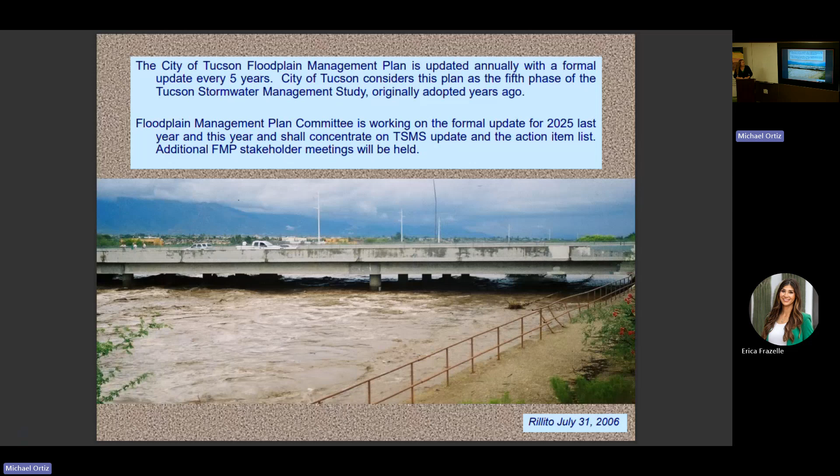We talked about the purpose of the floodplain management plan. It helps identify key projects and action items we have to prioritize, and it helps the public understand our unique floodplain conditions and hazards. It's our path forward for management of the floodplain.

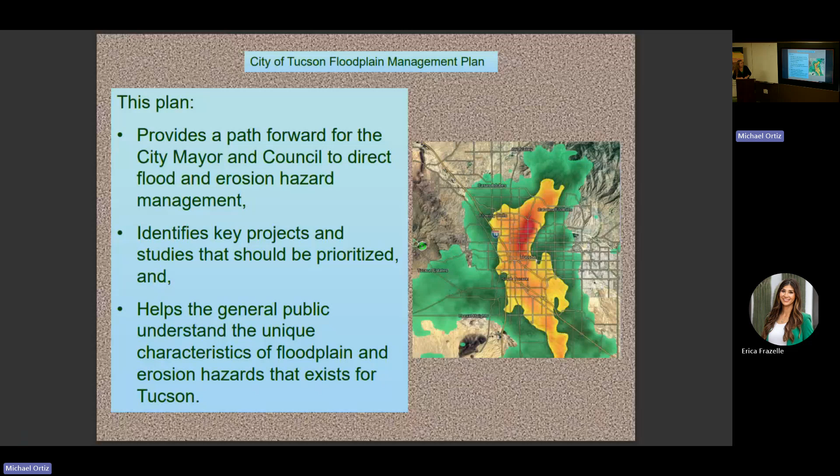This week is Monsoon Safety Awareness Week, which started yesterday, and that's why we're holding our floodplain management plan this week.

Our next speaker is Irene Ogata. Irene, do you want to stand here? Sure, I don't know—would it be better for me to log on? It's there. Oh, it's there? Okay, I uploaded it. There's a next one. Oh, you want to control it? Yeah, sure.

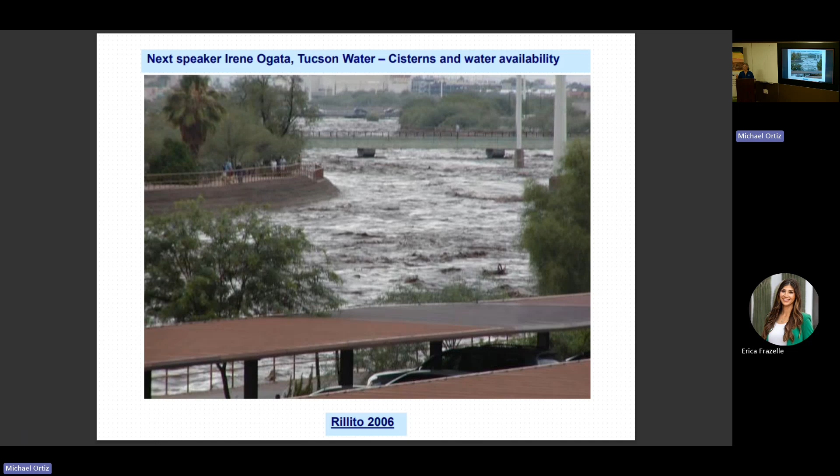So why is Tucson Water here? We're conservation and stormwater resource. Let me give a little background about Tucson Water itself.

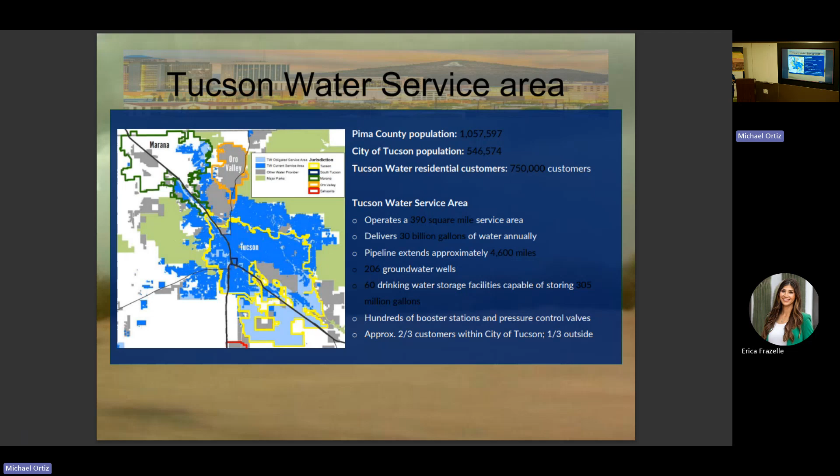We're 2/3 within the city boundary—the yellow is the city boundary, and 1/3 is outside the city. We have over 390 square miles in the service area, covering some of Marana and some of Oro Valley as well.

If we look at our water resources, we now say we have 5 water resources. Let me see if I can use the mouse here.

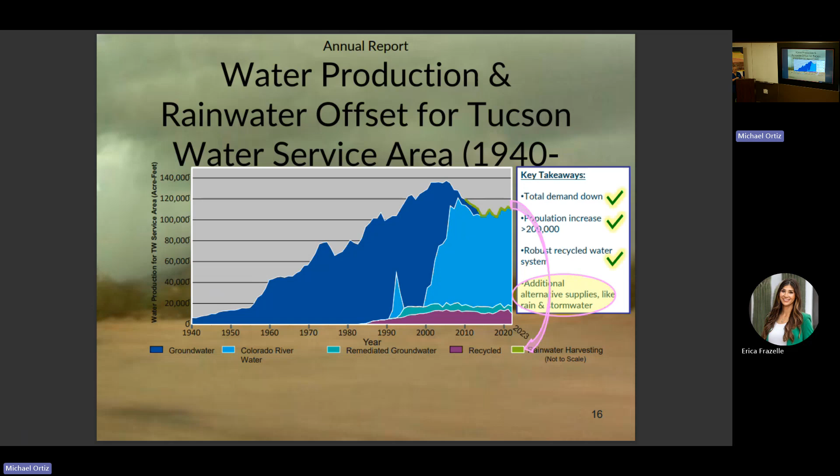Our drivers are threefold: federal, state, and local, plus what we do ourselves within the department. I'm going to cover the rebates and incentives, because that's where rainwater harvesting and the stormwater division come in. I'm actually housed in the conservation section, but I've done a lot of the stormwater resource and green infrastructure work.

We now have a whole new team called Storm to Shade, comprised of 4 individuals who manage that part of Tucson Water. If you look at your bill—how many of you are Tucson Water customers? Just about everybody. So if you look at your bill, there's a stormwater fee on there.

That fee is about 13 cents per CCF, which gives us about $3 million a year. With that fund, we do stormwater projects within the city of Tucson, since the fee only applies to Tucson residents—we do not charge Pima County residents. We work a lot with Pima County flood control on those projects.

I'm going to cover the rainwater harvesting rebate, which is up to $2,000 per customer per household. We also have a low income rainwater harvesting program in which we offer rebates, loans, and grants.

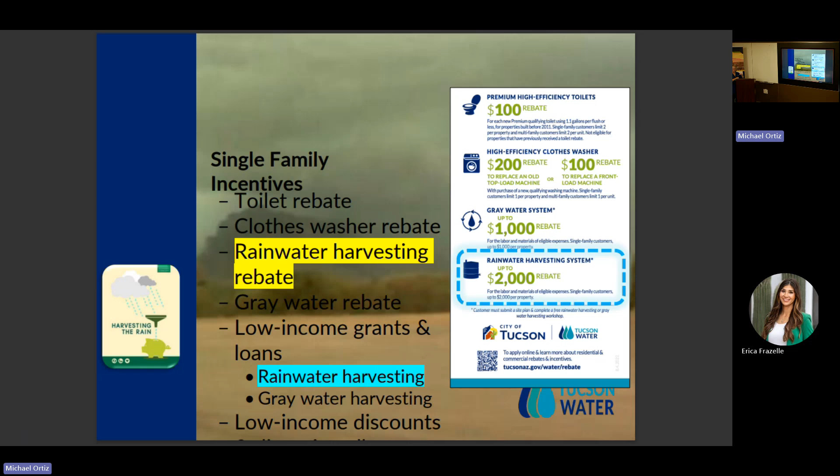What is it called—what's it called when you have attached... never mind. Anyway, we have a low income loan and grant program for rainwater harvesting. We saw that most of the time the rainwater harvesting was concentrated on the northern part of the city of Tucson, but now we're seeing more applicants on the southern side, so we think we're reaching more of them.

We also offer this same rainwater harvesting rebate for small commercial properties—anyone with a meter less than 3/4 inch. If you have more than that, you cannot apply for this program. There haven't been a whole lot of commercial companies applying for this rebate, but the incentive is there just in case they want it.

So what are we doing with rainwater harvesting? Just a little refresher—last year we updated our criteria. Prior to last year, July of last year, we had a 2-tier system.

The first tier was what we called the passive, and there was a limit of $500, and it was only good for material costs. Whereas the active, which is the cisterns and the tanks, was based on quantity, so it was $1 per gallon. So if you had a 1,500 gallon tank, you got $1,500. And the limit again was $2,000 for either of these programs.

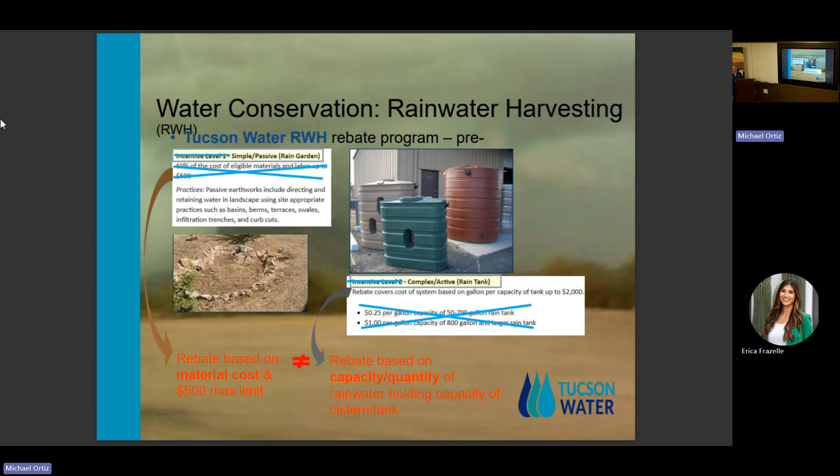But you already see in the passive, there's a cap of 500. So we thought, well, this isn't promoting passive rainwater harvesting. And talking to all the engineers, it seemed as though the passive side would be much more beneficial than just the tank. So we were trying to put a little equity into that, and we changed it.

So basically what we did with the rebate was we did away with those two programs, and we only made one criteria. The criteria was going to be based on quantity only. And the cap was still going to be $2,000, but you could have either passive, active, or a combination of the two—it didn't matter what you had in your system. It was all based on the capacity of the water you're holding on site.

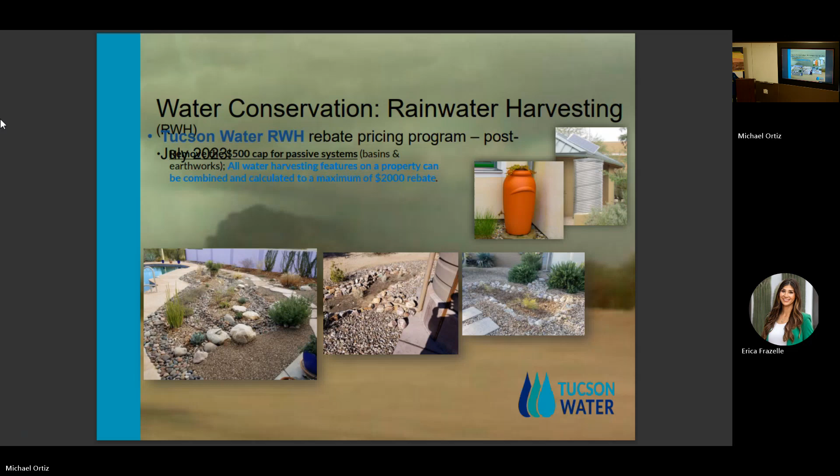So again, because of that, it was going to be $1 per gallon for the capacity. But the other thing that we did was for the earthworks, because we know that if you have a basin, there's infiltration of water. So we were giving basin volume a quantity of 1.5 times its actual calculation, to include the potential infiltration of the basins.

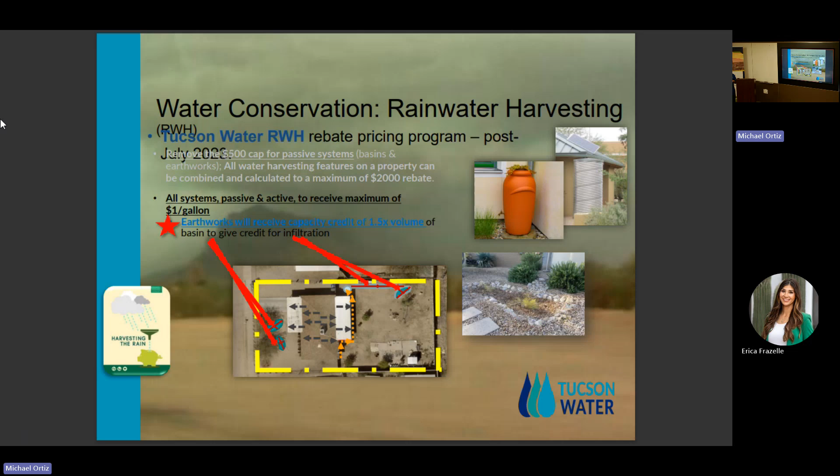The third thing we changed about the criteria, looking at both the city and the county—both having this 1-inch retention first flush factor—we wanted to tie into that. So we're saying that the system has to capture 1 inch of that first rainfall within their system in order to get the $1 per gallon. If they do not reach that capacity with their system, then they only get 50 cents per gallon.

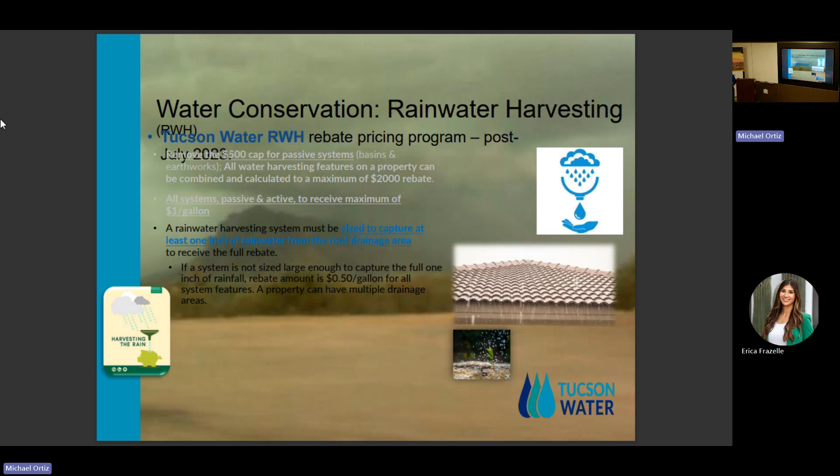The way we were doing this, what we did not do in the past is we did not have this data. We didn't know how much people were storing on site in terms of their passive system. We knew from the active system because it was tank sized, and it ranged anywhere from a 50-gallon barrel up to a 2,000-gallon tank. Some people would do maybe more than 2 tanks, but again, the capacity for us and the rebate was just $2,000.

Now everything, the application is electronic. So they need to enter the size of their roof, which then calculates how much rainfall we're capturing off their roof. We're saying at this point that the roof is the watershed, because that's the largest impervious surface usually on an urban property.

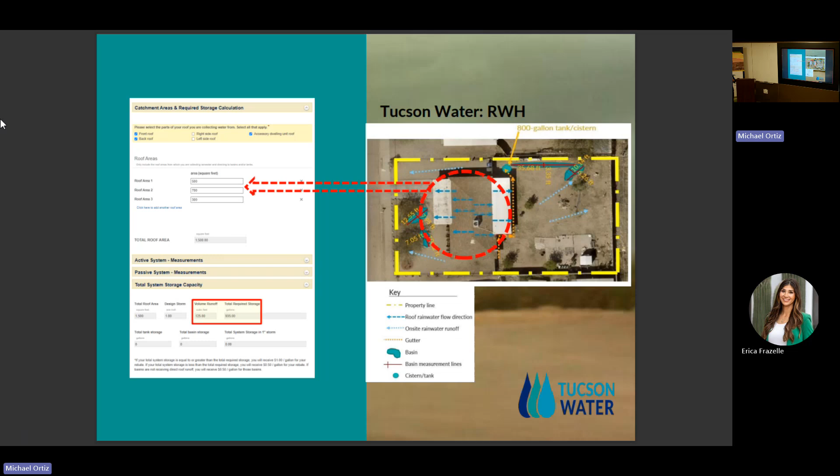The other thing we're asking applicants to do is when they put their basins in, all they need to do right now is give us the longest length and the widest width, and then put the calculation in there. By default, we're saying 8 inches is the depth. But if it's more than 8 inches, they have the option of changing this factor. Right now, by default, it's 8 inches.

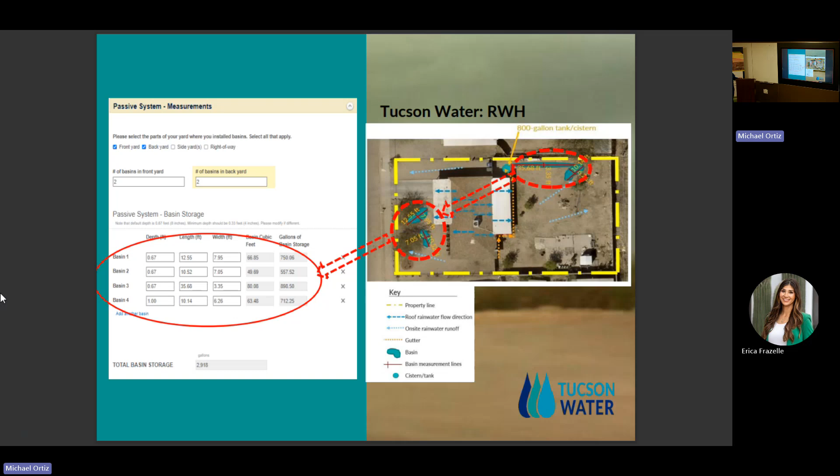And so now we're capturing this data about the volume of the basins. And then again, on the back end, given the length, width, and depth, we add that 1.5 times the capacity of that volume in order to give them credit for infiltration.

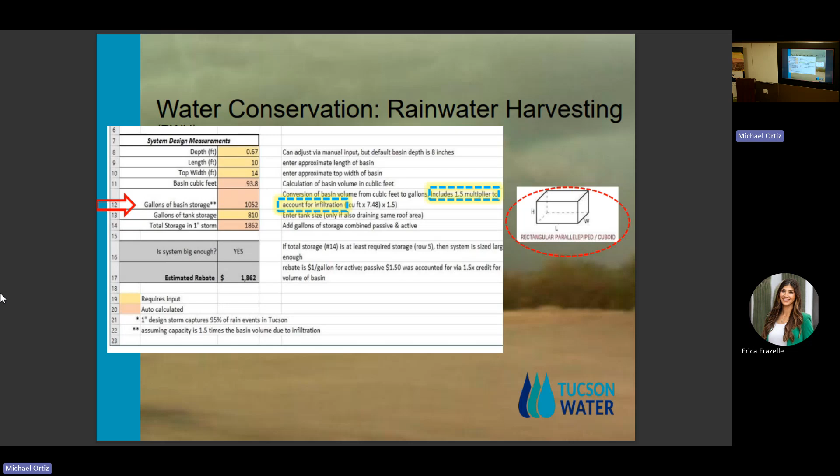So again, what we have now is the volume that's coming off the roof, and then the volume of the system size, and then if they exceed the volume of the capacity of the 1-inch rainfall, then they get the $1 per gallon. Most of the applicants so far—we've only been doing this since July of last year—most of the applicants have met the capacity, so they have gotten the $1 per gallon rebate.

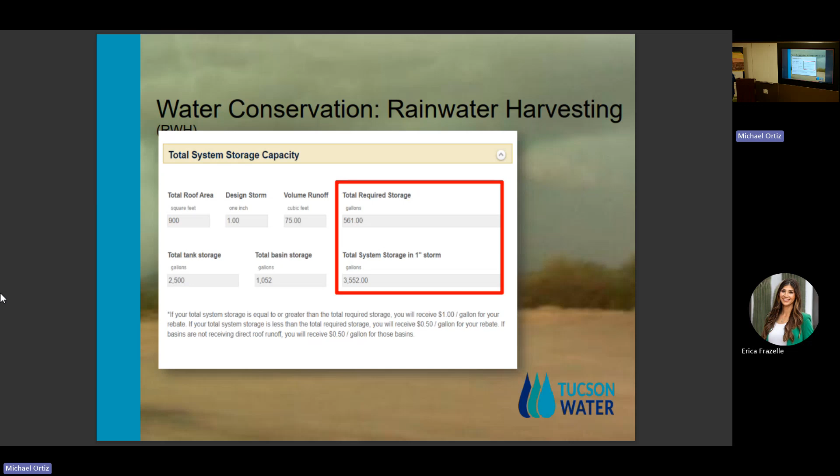So what may be of interest to this group is, how much water are we collecting? We're excited about this because we never had this data before. And now we have data. Is it wrong or right? We're looking a little deeper on that as well.

We know now by system type what the average amount of water we're collecting is. For an active system, maybe about 1,700 gallons. A passive system is maybe 3,500 gallons. Remember, we're giving them credit for 1.5 times the basin volume. And then the combined system, maybe 2,300 gallons.

So maybe of interest to this group is, for that 1-inch rain event, how much are we collecting? We're collecting maybe about 335,000 gallons. It hasn't been the whole year yet, so less than a year. I think what that means for this group is that much water is being deferred or not reaching the streets because it's being captured on the property itself. Hopefully we'll be able to track that, but that's a deferred runoff into the streets that we're saying is happening. And that's why the connection between the 1-inch rainfall event and the capacity.

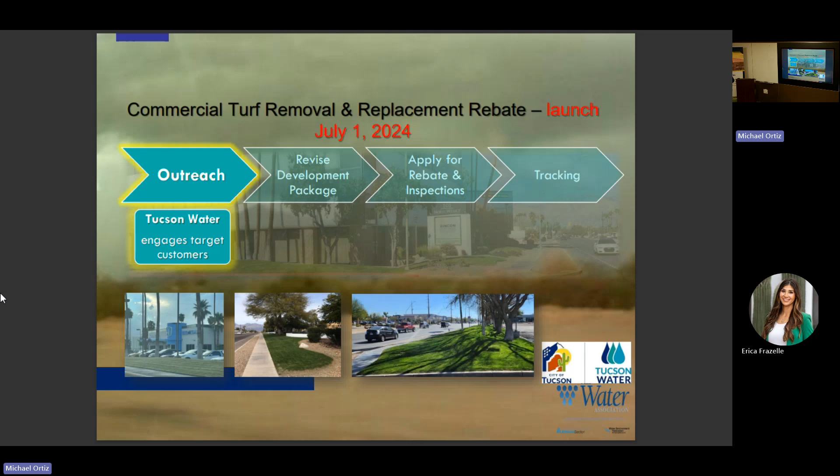Good. Thank you. Any questions? Comments? Very interesting. Thank you, Irene. I like that first chart.

Okay, with our different amounts of water that we have non-revenue. Our next slides are... did I skip? Good.

Yes, so again, my name is Savannah. I'm the emergency manager for the city, housed in the city manager's office. I say that I'm housed in the city manager's office because traditionally this role was in fire before about 1.5 years ago. The city manager, former city manager Mr. Ortega, moved it into his office about a year and a half ago, so we can focus on that planning and preparedness that was getting a little bit lost, being that the fire department was really focused on the operational nature. They didn't have a single person—it was kind of a group of people who managed emergency management versus having one singular person doing that planning and preparedness.

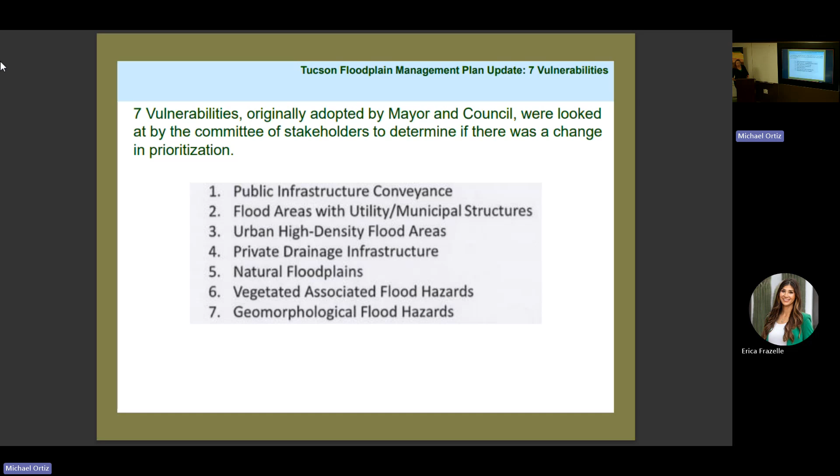Okay, but we're going to be looking at things like accessory dwelling units, which are a big push right now, and we're going to ask whether or not those increases in accessory dwelling units are making a difference in runoff - increased.

We already have a conservative model from TSMS, so it may be that it's already incorporated into it, or it may not be, and so we'll have to look at maybe increasing development requirements to be 20% instead of a 15% reduction in the offsite outfall of the flow from a development site, because currently we have a 0 to 15% decrease for development.

So if we want to be more conservative, we look at 20%. That's an interesting approach, now that we have some of the data about the runoffs, with the rainwater harvesting and what gets deferred and what doesn't get counted as part of the runoff now. So even with ADUs, will that - I don't know, maybe make it a requirement that if you're adding an ADU, you need to have a basin or a cistern?

Correct, yes - and that's part of what we're going to be looking at. We're going to say, is this making an impact if we have X number of ADUs in certain watersheds? How does that impervious increase change the runoff characteristics? And if it is, then we're going to be changing development standards to make sure we're reducing it back to what our intent was for TSMS, or looking at other aspects. If there's climate data saying we have to do even more reduction, then we'll do that.

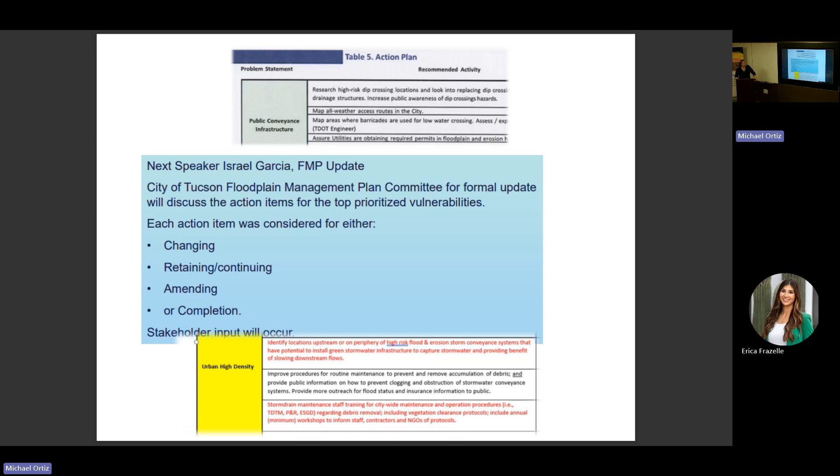Next speaker is Cy Miller from J.E. Fuller, and he's going to be talking about the Alamo Wash project and basin study, as well as geomorphological issues in the floodplain.

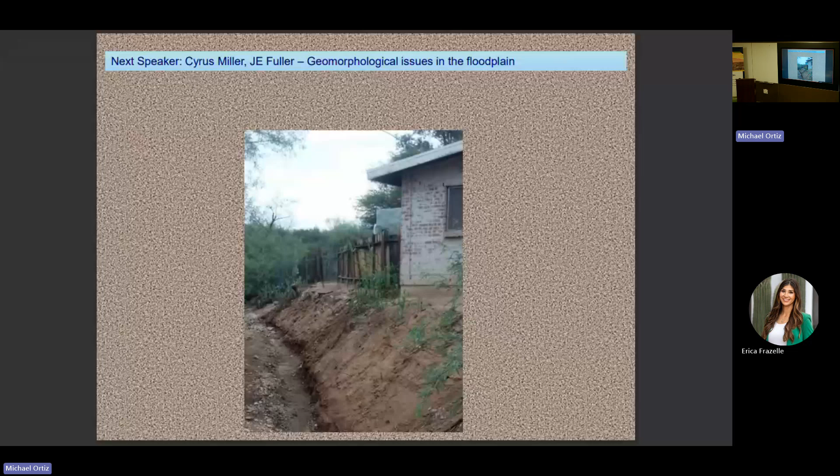Thanks, Cy. Is it possible to get to the PowerPoint? I only have this file. I had all kinds of exciting things in the PowerPoint, but it's fine, I can go ahead with it as it is. While you're starting, I'll send it over to Michael and maybe we can get it to work. Okay, all right, well thanks.

Thank you, my name is Cy Miller with J.E. Fuller. I wanted to present on the Alamo Wash Basin Management Plan. It was a project we were involved with and supported around the 2017 timeframe, finalized in about 2020. We were a sub to CMG on this one, and our contract was with Pima County Flood Control, but City of Tucson, Elizabeth, was a key partner in the project.

I was asked to present about geomorphological issues and hazards. I'm not a geomorphologist per se, but I am an engineer, and I consider myself a student of geomorphology, especially how it affects our definition of flood hazards throughout the city and elsewhere.

So, the Alamo Wash watershed - how many are familiar with the Alamo Wash? Sometimes I channel my Uncle Rico and say I could throw a tennis ball from my backyard into the Alamo Wash. I live pretty close to it, in the watershed. So it's kind of near and dear to me - I was excited to get involved in a project that was essentially in my backyard.

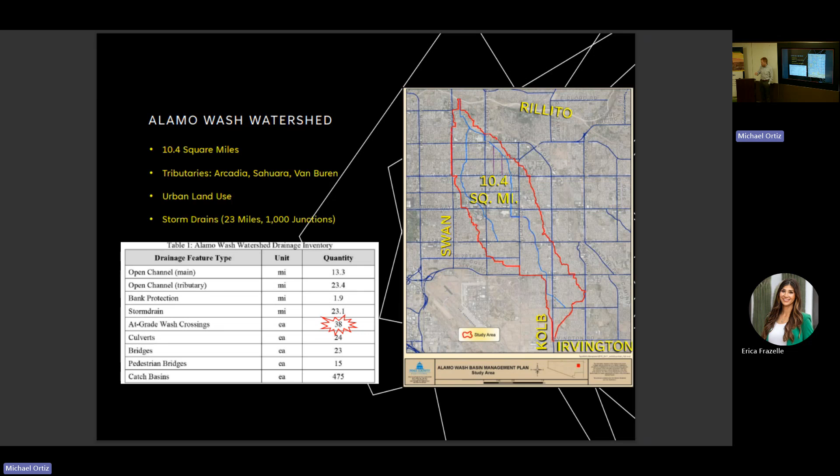In the table are some statistics about the watershed, the open channels - we had 13 miles, and I'll point out these at-grade wash crossings, we had 38 at-grade wash crossings. I went to a pool party on Sunday at a friend's house and crossed the Alamo Wash, I think twice or four times to get there through a dip crossing. I think we're probably all familiar with these dip crossings. As far as hazards go, I see those as being the biggest hazard present in the watershed, because people will try to drive through it and get their car stuck and have to be rescued.

Our basin management plan had some typical aspects - an existing conditions analysis, which noted the urban watercourse nature, reaches with concrete bank erosion protection and all the storm drains. We did our hydrologic and hydraulic modeling, using Flo-2D with a 15-foot grid covering the entire watershed, which allowed us to couple the storm drain analysis with the Flo-2D runoff calculations. That was supported by a flood frequency analysis - we were lucky enough to have a gauge in our watershed that we were able to tie the historic data to our model results.

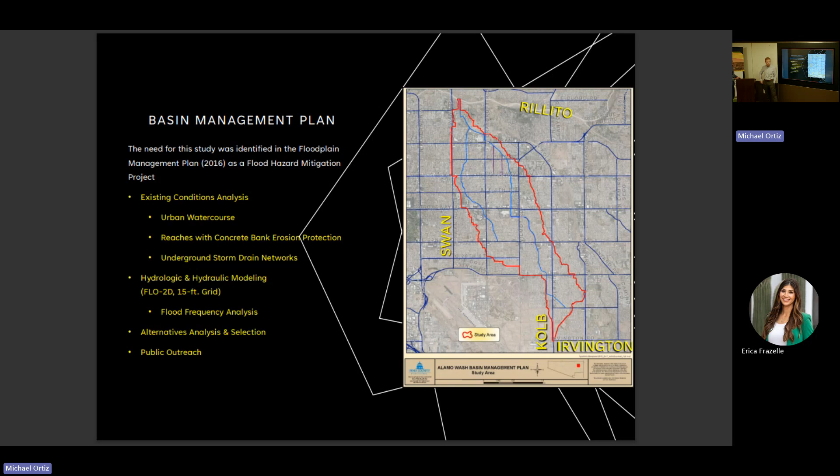We went through an alternatives analysis and selection - the difference between a study and a plan was that we actually came up with potential solutions for the watershed for some of the identified problems. That involved a huge public outreach and public participation part. Okay, so.

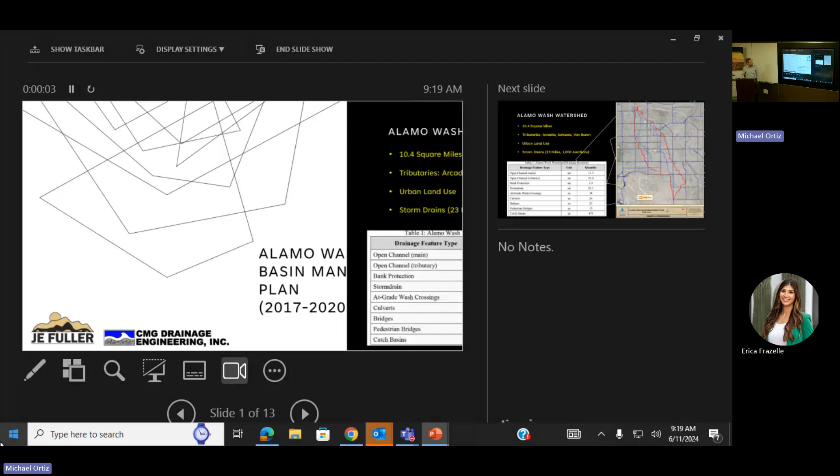Okay, I think that was all I had on that slide.

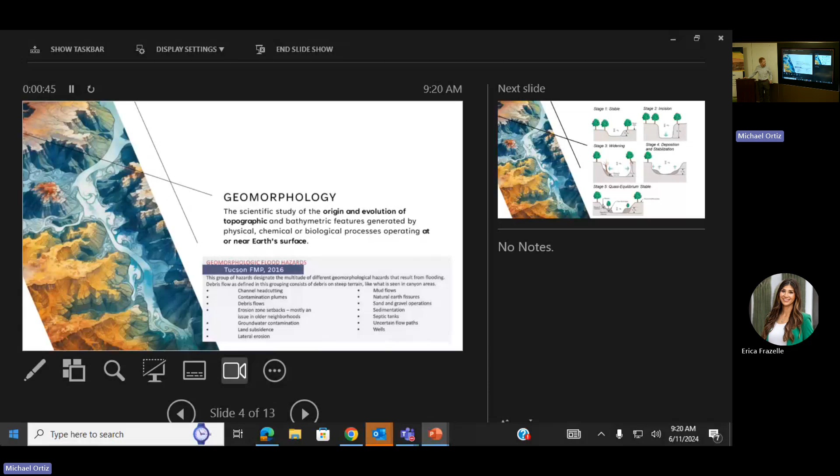So geomorphology is the scientific study of the origin and evolution of topographic features generated by physical, chemical, or biological processes operating at or near the Earth's surface. There's a whole study realm of geomorphology, but this is more recent timeframe geomorphology as it affects our city infrastructure. The city's floodplain management plan listed all these potential hazards as they relate to geomorphology in the city.

One geomorphological fundamental happening that we see in the Alamo Wash particularly is the incision of the watercourse, where the bed of the wash is dropping down. That's stage 2, where we go from a stable condition to an incision condition. Over time the banks start to erode back, the wash widens, and typically we get to a stage 5 where we reach a quasi-equilibrium, with an inset floodplain and a new floodplain. The historical floodplain up on the upper terrace is disconnected from the flood flows, and a new floodplain develops inset within the incised channel.

So this is quiz time. Which of these geomorphological hazards does not occur in the Alamo Wash? I've got a parting gift for anybody who can get it. We've got channel head cutting, erosion hazard setbacks, debris flows, lateral erosion, sedimentation, and uncertain flow paths. I know many of you are not geomorphologists, but anybody have a guess? Which one does not occur?

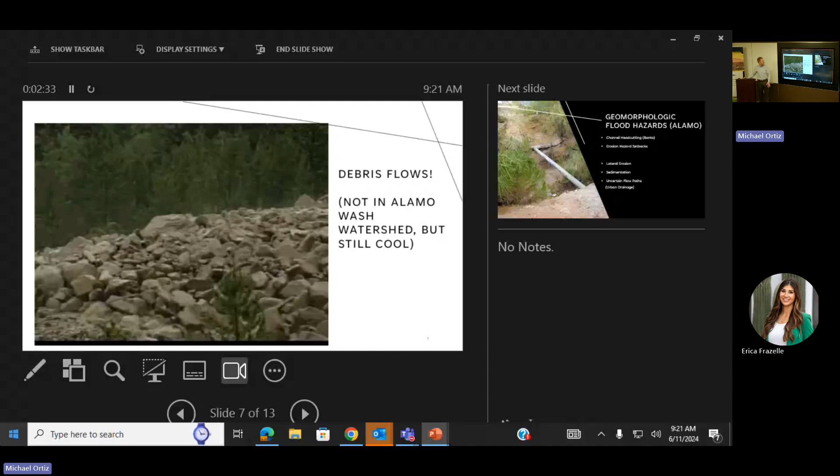So debris flows, I saw an opportunity to show a video of what debris flows look like in geomorphology. This is exciting to me, it's cool, but it's not going to exist in the Alamo Wash. Anyway, we'll move on - so that's what a debris flow looks like.

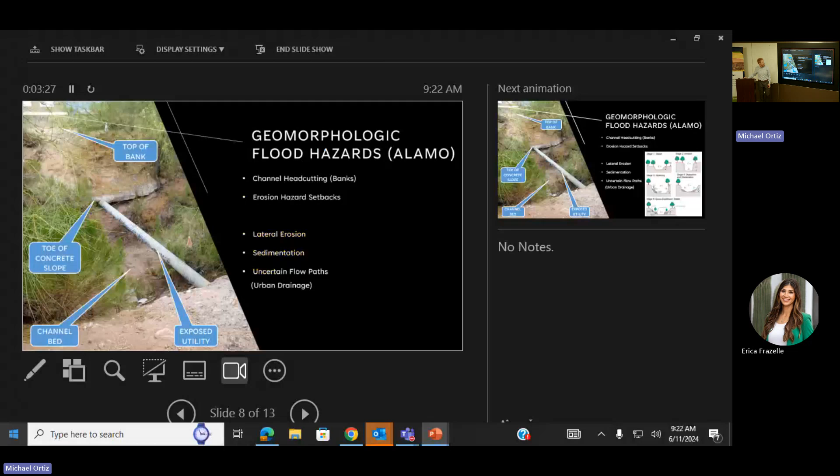In this case, we had the toe of a concrete slope - concrete slope protection that was built to protect this utility. At the time they built it, I think they thought that was the toe and it was never going to change. But of course, as we see today, that did change, and we see this exposed utility as a result. So the channel wash has cut down below this utility, and now we're faced with a potentially hazardous condition if that utility was to break as a result of a flood flow.

So that's just getting back to our standard fundamental. Is that a sanitary line? I think it is - I think many of these are sewer lines. Yes, sanitary sewer.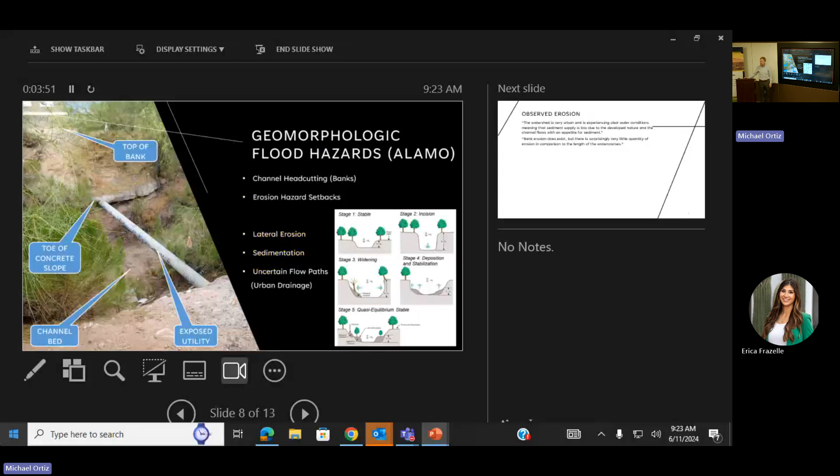So of the observed erosion - this is from one of the reports we generated during the study - it's very urban and experiencing clear water scour conditions, meaning that sediment supply is low due to the developed nature, and the channel flows with an appetite for sediment. That means all the clean water running off parking lots and houses is hungry to carry sediment. Really, the only place to pick it up is from the bed of the wash, and we get this incising characteristic of the wash. Bank erosion does exist, but there's surprisingly very little quantity of it in comparison to the length of the watercourse.

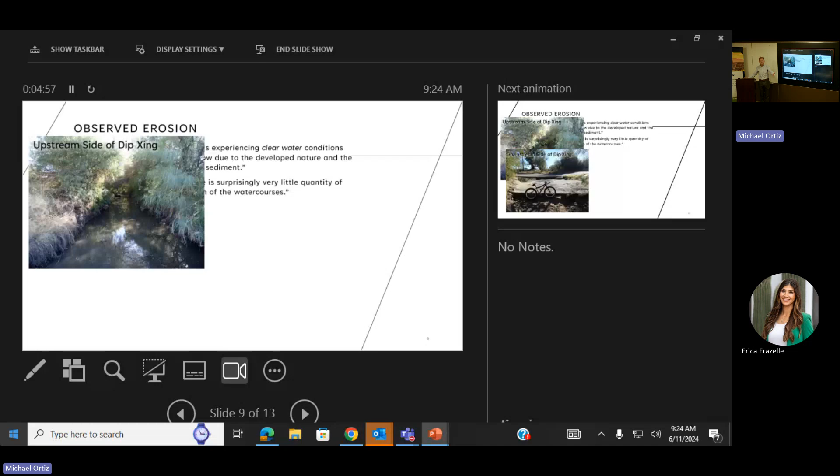So this is what I noted during some of the field work. This is facing upstream at a dip crossing - I was standing at a dip crossing facing upstream. I think this is in Arcadia Wash, and you can see this ponding here. This was after the rain event - there's ponding in the bottom of the watercourse. What this tells me is that even on the upstream side of the dip crossing, the watercourse is incising.

This is the downstream side of the dip crossing - I think this is that pond we can see up there. This might not be the same dip crossing, but it shows the fundamentals I'm trying to demonstrate. The downstream side of the dip crossing is now degraded down below, to where a lot of the erosion protection on the downstream side is now being undermined.

So I have a question - is this more just localized scour, like just downstream or upstream of different junctions or the edges of these embankments?

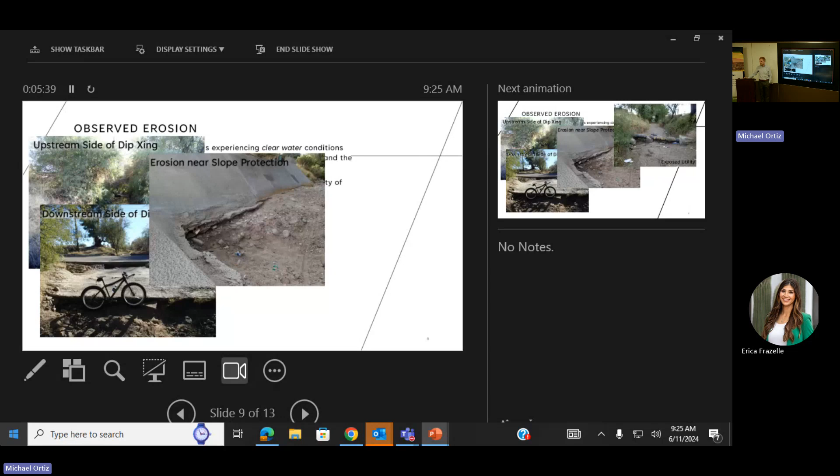Is it definitely going down like in that first picture with the sewer? It's incising, and it's not entirely throughout every part of the watercourse, but it is in many parts. It's confined - we've got dedicated drainage ways, right of way, public common areas, and things like that confine the limitations of the wash. So really the only place it has to go oftentimes is down if it wants to pick up sediment.

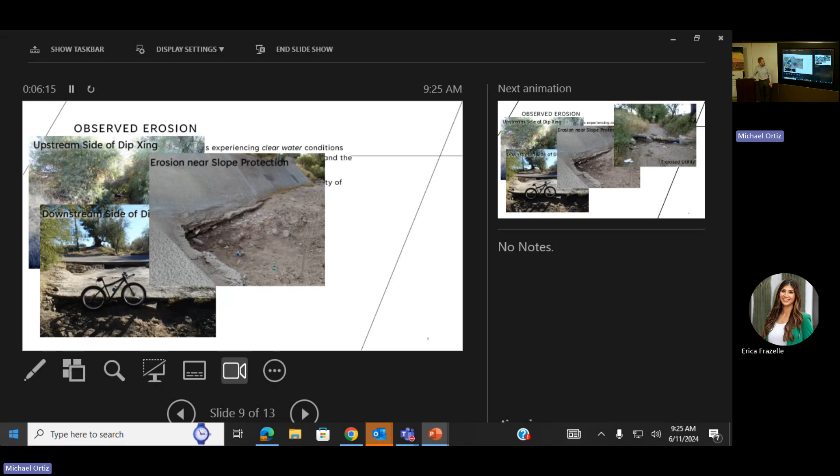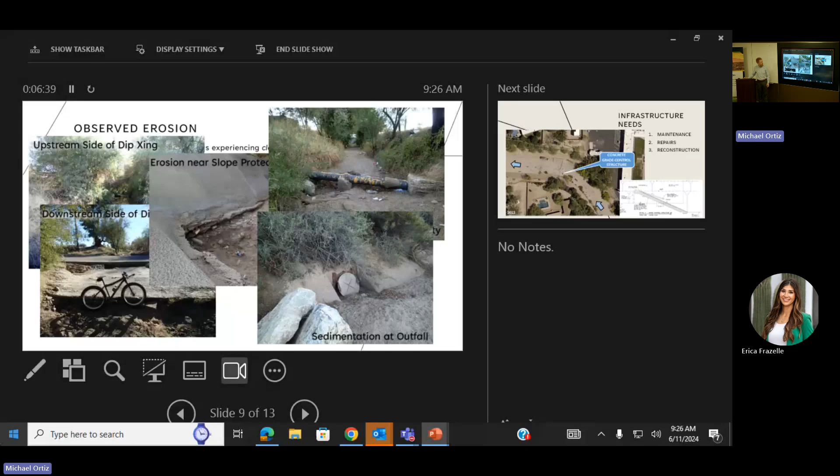So there's erosion near slope protections. Again, we have exposed utilities and sedimentation. This was sedimentation - this is the north end of the watershed where it gets close to the confluence with Rillito. We can see this outlet control flapper is not even operational because it's sedimented in. There are some upstream things they're trying to do to mitigate that, but I don't think they're all that functional.

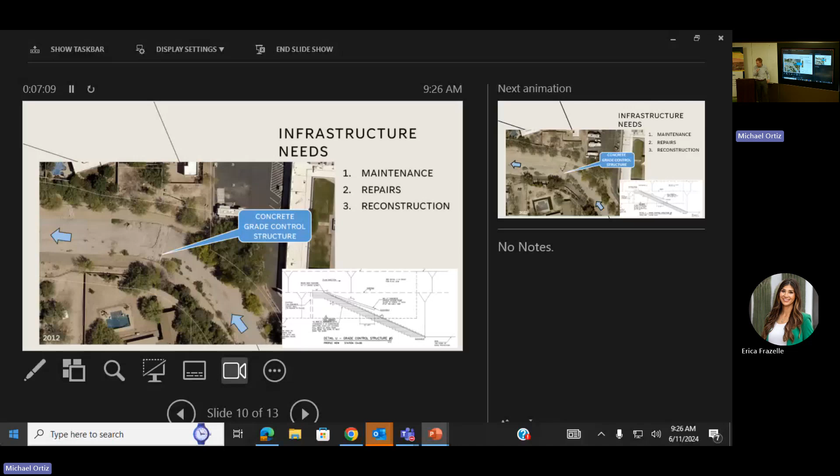So how does this play into our infrastructure needs? I can see this when I leave my house in the morning. This is a grade control structure. What we're showing now is a picture from 2012. The cross section at the right is of the grade control structure - we've got flow in the cross section, flow left to right, but in the plan view aerial photo, we've got flow right to left. What that's causing is undermining - the concrete foundation below the bank protection, below the grade control structure, is being washed away.

That concrete that was there in a wedge kind of pattern is now falling into the wash, and eventually over time this may have some problems. So I see this in a progressive fashion - we have maintenance needs, and then eventually if we don't get to those maintenance needs, we'll have to have repairs. And if we don't get to those repairs, we'll probably need reconstruction on some of these things, if we do want to keep the wash where it is today.

Sounds like road maintenance and repair reconstruction issues. It will be a project, yeah. Not having the funding to do these - the maintenance, and then we have to move to repairs, and not having enough money for that, and not having money to reconstruct even. Yep, yeah, I get it.

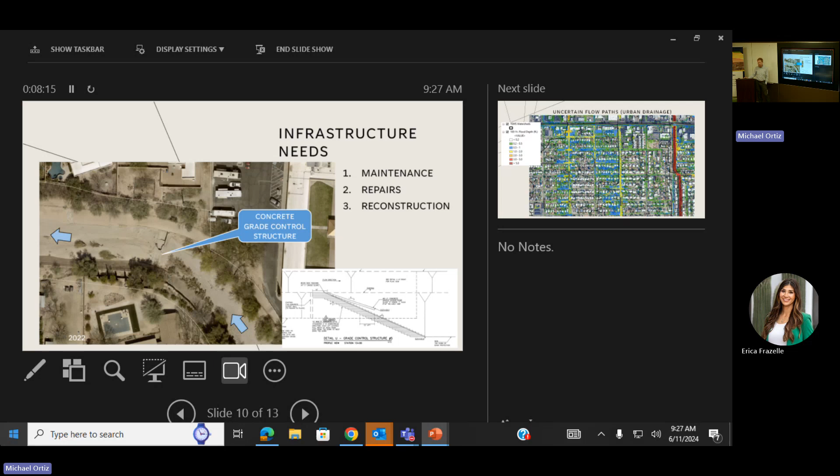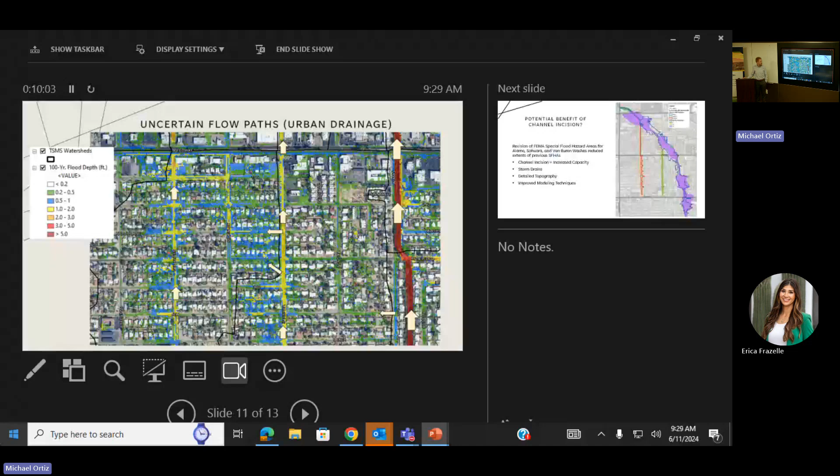And what that results in is that if we assume all that area in that discrete watershed is draining to a particular point, and it's actually draining to another point, or part of it is, we might overpredict in one location and underpredict at the other. So this is uncertainty. With a refined model like FLO-2D or 2D analysis you can see those types of things, whereas with a 1D analysis like HEC1 you just can't, unless you break your subwatersheds down to a really fine scale.

One benefit I saw of this potential channel incision - and I don't know if this is entirely attributed to it, but I think it helped - is that during the course of the project we identified a number of locations where the FEMA special flood hazard areas were inaccurate compared to what we predicted using FLO-2D. The shaded colors on the map are the previously effective flood hazard areas, and our outlines show our LOMR, when we did a letter of map revision to reduce some of the floodplain areas through the city. Sometimes it got expanded, but for the most part there was an overall net reduction in flood hazard area.

Other aspects that could lead to the reduction in flood hazard areas include storm drains, our detailed topography, and our improved modeling techniques. But I saw the channel incision leading to an increased capacity, allowing us to reduce the floodplain in some locations. So that's what I had.

I missed one part about those dip crossings. When we have incision, especially on the upstream and downstream sides, one of the biggest hazards in my mind is when the wash is flowing and you're trying to drive through a dip crossing, you don't know if the pavement's still there. It might only look like it's 6 inches deep and you might think you can make it with your car, but you never know what's going on underneath. Especially as these things start to degrade, they're going to be more and more hazardous.

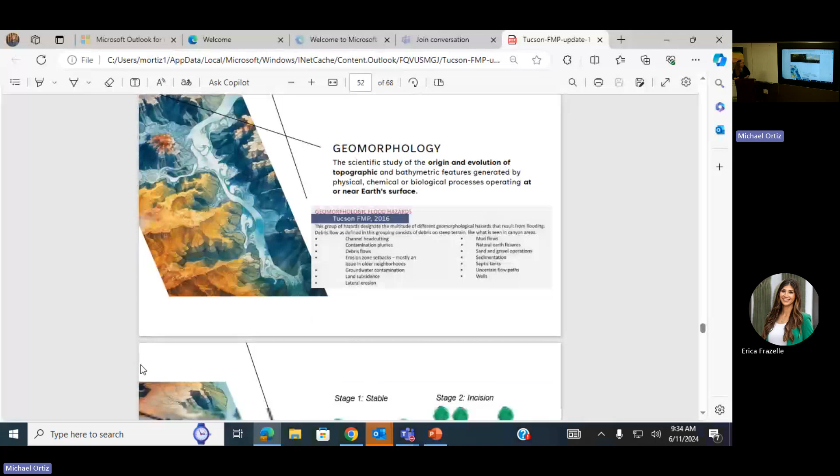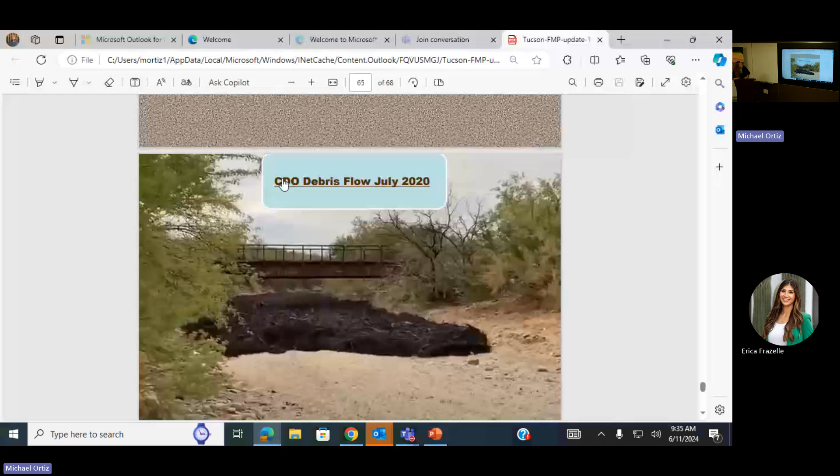Thanks for pulling up the PowerPoint, Elizabeth. Sorry, I realized we had that interactive video aspect. So I think that's it. I actually had a link on this that I don't know if it'll run.

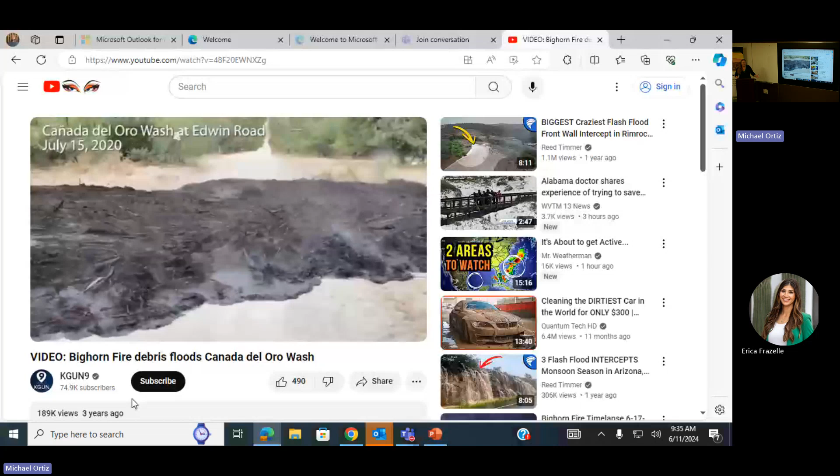This is the CDO debris flow in 2020 after the Bighorn fire. You can see it moving through. The county flood control said this was steam coming off—no, this is not lava moving, this is dust coming off of this ashy-laden debris. See how it hits some of the dusty sides and creates this smoke-looking effect, but it's actually just dust. You see some standing wave action there too. It's a mix of water and debris. That's kind of interesting.